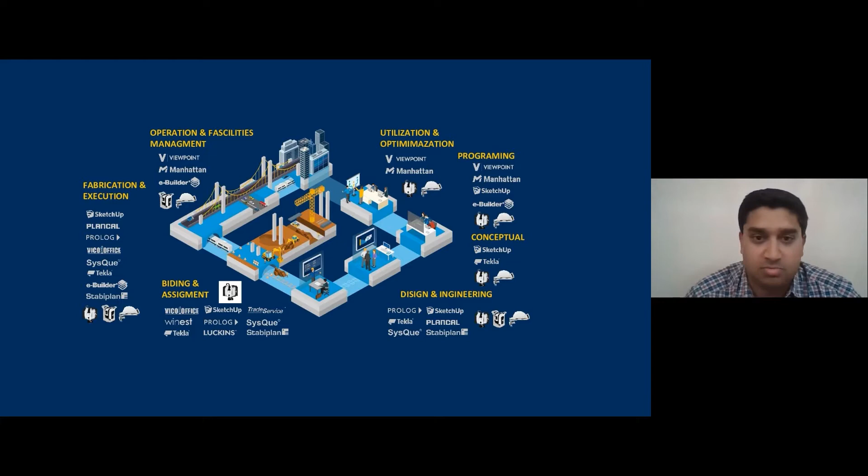Trimble itself has solutions right from a building concept all the way to building construction, to complete the full life cycle of the building. So concept to reality and onwards, all the way to facility management, and so on and so forth. So the big thing for us at BuildingPoint and at Trimble is the connected construction idea.

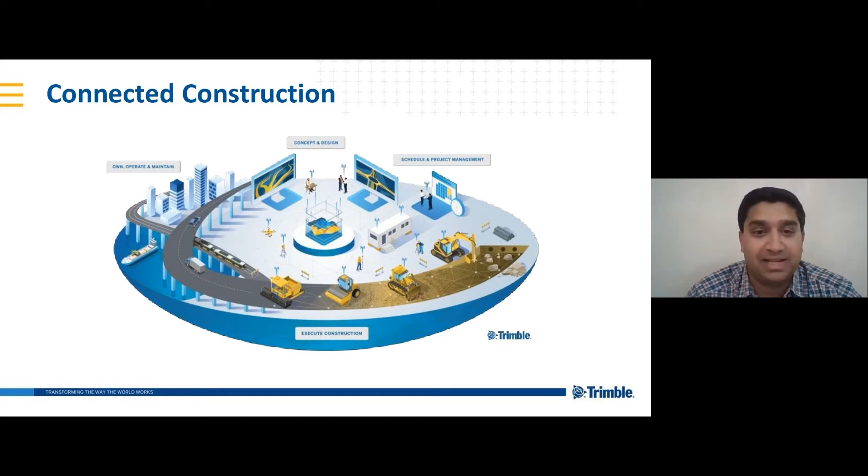We've all seen beautiful BIM models containing a lot of detailed information that can be used downstream and should be used downstream all across the construction life cycle. So the big push from us is this connected construction that brings this information forward through all the construction stages, and build from the model, build with the model.

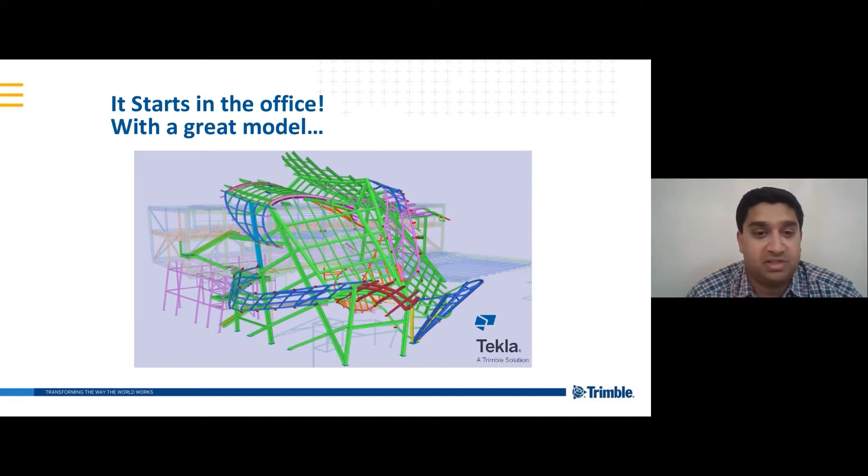So of course it all starts in the office with a great model. You put all this information into a connected model, all the parametric information, everything that is to be built should be incorporated into the model itself.

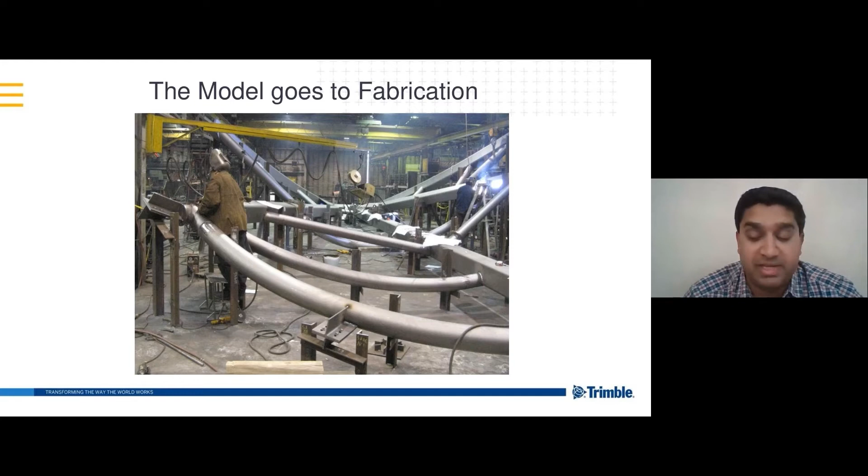And that same model then gets pushed onto the fabrication stages, so it can be used for shop use to create pieces, to create parts, for fabrication, for assemblies, and things like that.

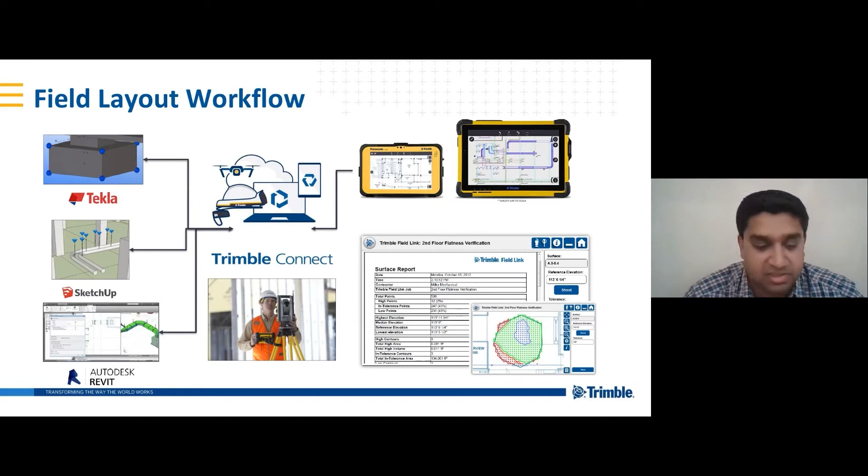Now, what happens after that is sometimes that information does or does not make it to the field in its entirety. And that's the big piece for us, where we want to make sure that this information, regardless of what tool it gets created in from your authoring tool, does translate all the way down to the field, the construction site, to make sure that all this information, the connected model, the complete information, the parameters, everything kind of gets trickled down.

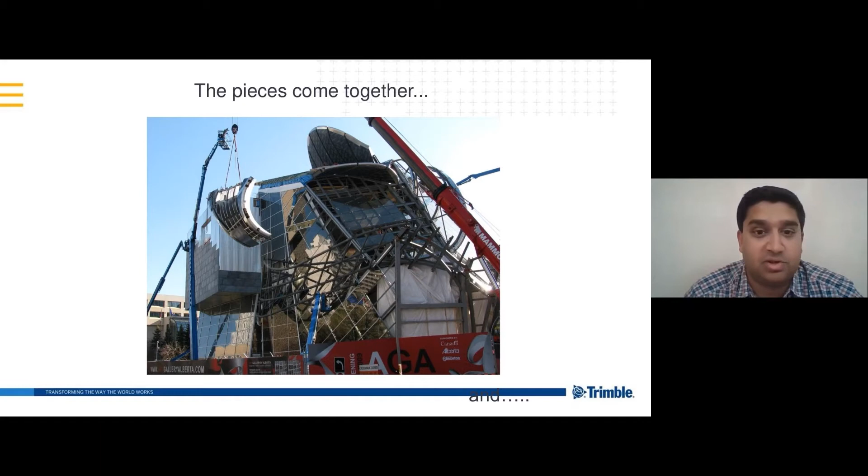So some ways in which that can be achieved is by using robotic total stations and such. So bring your point information, bring your layout information all the way to the site, and then the pieces start to kind of come together.

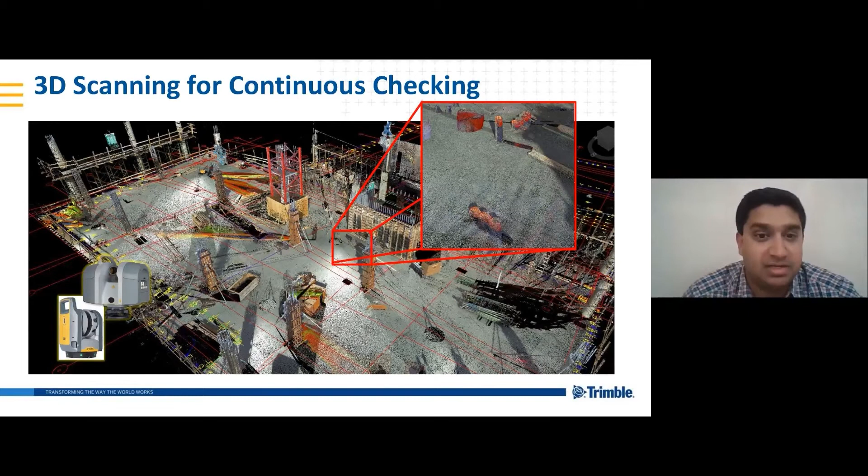From there on, we encourage the use of 3D scanning so that you can verify and check the construction progress versus your models, making sure there are no clashes, no omissions, and things are going as planned. There's not much missing out over there.

There are several tools in our portfolio. My favorite one is Trimble Connect, which allows complete collaboration all the way from the information that sits in the model and how that can be shared across disciplines, across companies, across stakeholders on the project, so that they can all share information, not just model information, but content information.

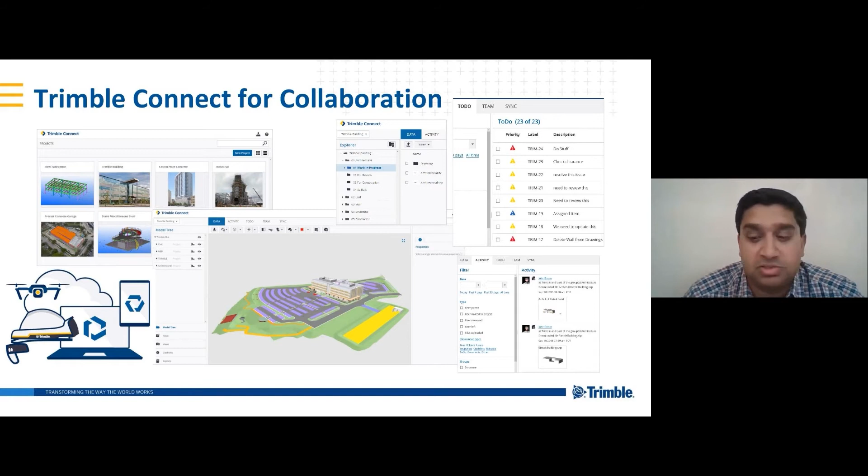And this does not have to be a one-way process. This is a two-way street. So the big push is not to work in silos, but to work with everybody and make it a team approach.

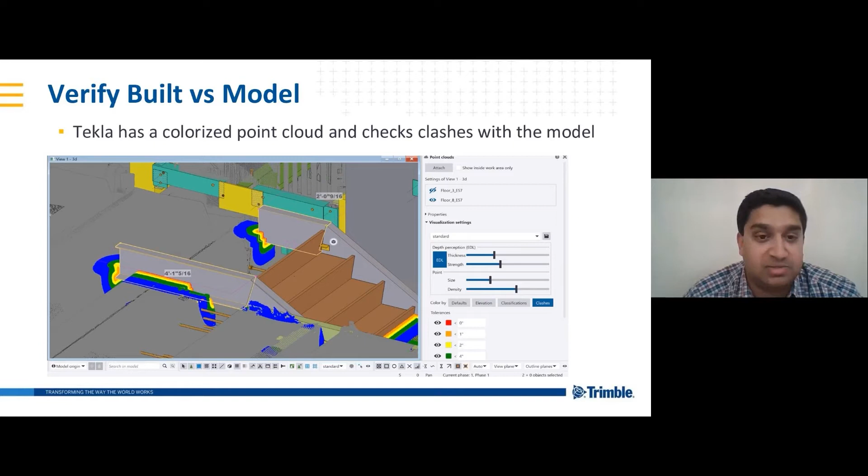So over here, the information from the site has traveled back into the 3D model. We mentioned 3D scanners - during construction stages, you can scan for information, and that information comes back into the models, and we check against the model to make sure we're not missing out on stuff, or there are no clashes per se. On this slide, you can see there are some clashes, and something like that can be found out pretty early on, and corrective actions can be taken.

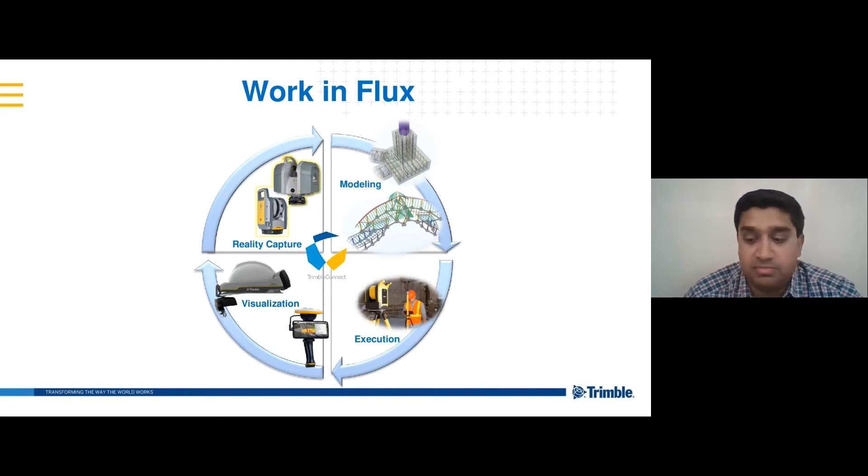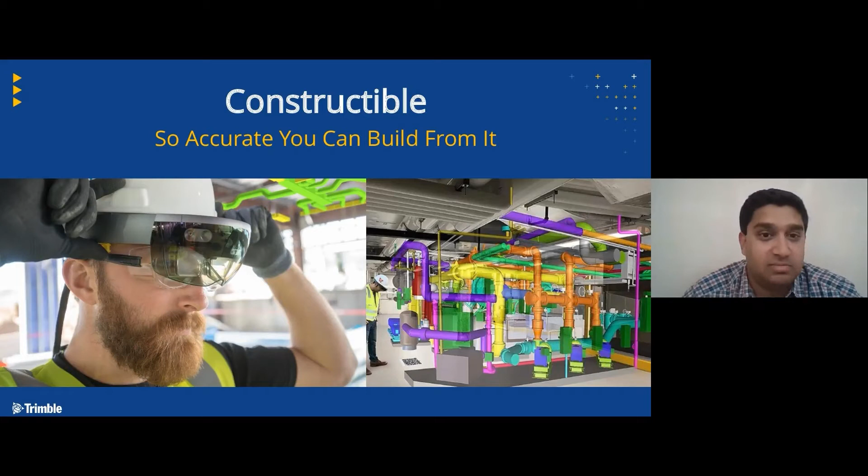And as we go through the process, voila, you have a beautiful project completed out of that same information that you started with. So the big thing from us is work in flux, don't work in a silo. Take the information straight from modeling through execution to the site, bring it back into the model, and complete the full workflow. We have various tools that can assist with that, and the big push from us again is build from the model, a constructible model. Take the information with you to the site.

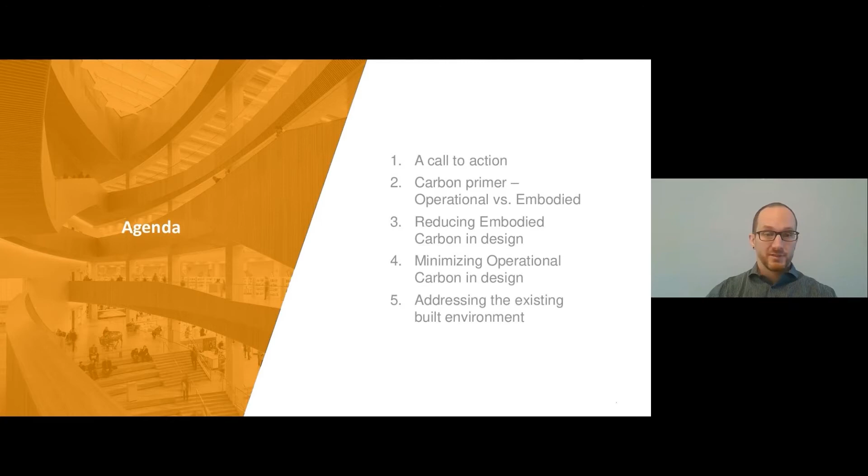So part 1, a call to action. Climate disruption is a real thing and a massive problem facing humanity as a whole. Our house really is on fire, and it's important that we begin to act with an appropriate sense of urgency.

It has been generally agreed upon that within the next 10 years, the global economy needs to massively reduce the greenhouse gas emissions associated with economic activity in order to have a hope of not locking in a series of feedback mechanisms that will amplify our own climate impacts.

To be frank, nobody has a clear idea of how this is going to play out. It is, however, widely accepted and recognized that no one industry, nation, or group can bring about change on this scale. It will need to be a collective effort across all branches of the world economy. Think silver buckshot instead of a silver bullet.

Now, in Saskatchewan, Regina particularly, from a purely weather perspective, this means that the average annual temperature is going to continue to rise through the remainder of the century. I'd like to point out that the data on this slide and the next couple of slides comes from the Climate Atlas of Canada website, climateatlas.ca. I encourage all of you to check it out and become informed of potential climate impacts in the areas where you design.

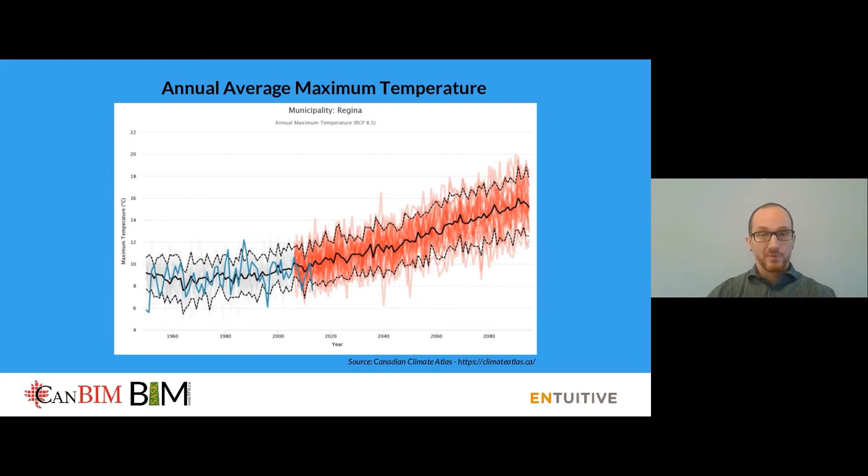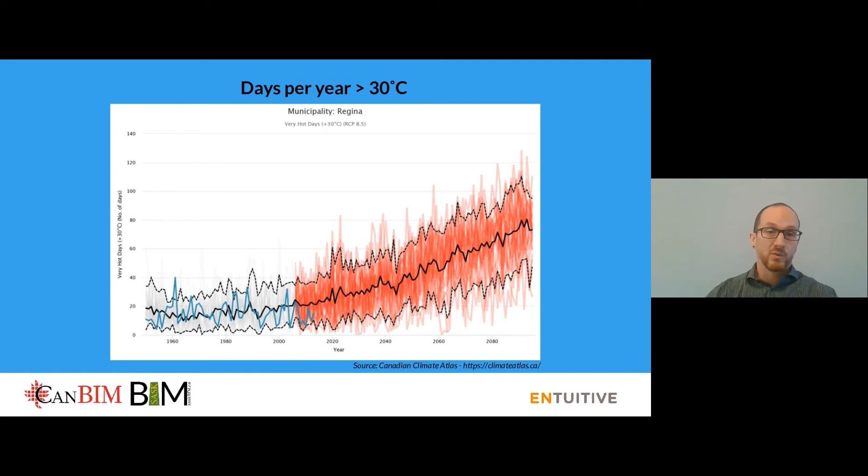A similar trend presents itself for very hot days in southern Saskatchewan, with a statistical increase expecting to see the number of very hot days triple by the end of the century, and with worst case scenarios looking at a 5-fold increase of these weather conditions.

So if you're hoping that climate change would bring an end to harsh prairie winters, you're probably out of luck. But you can expect that your summers will get hotter and have substantially more intense storms.

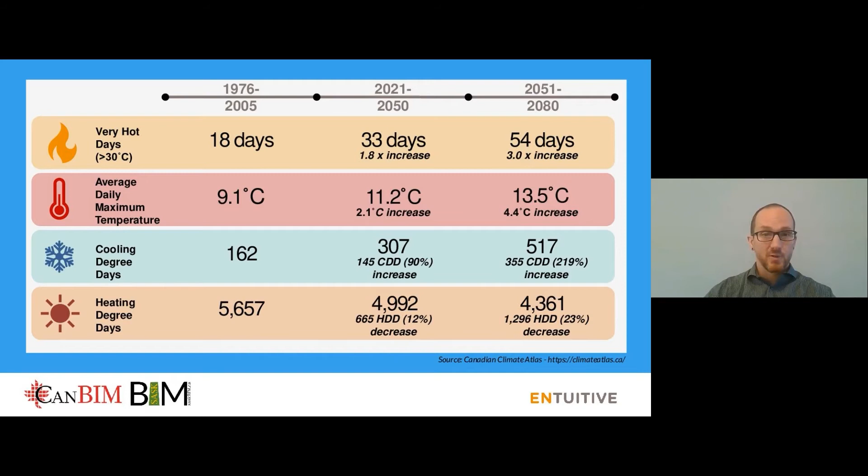I'm hoping at some point you've all seen plots like this of some kind. These next few slides are borrowed from our colleagues at Mantle 314, who Entuitive has been working closely with to gain a deeper understanding of embodied carbon and upcoming carbon policy.

These 2 plots represent the GHG emissions reduction targets necessary to avoid the worst impacts of climate change. On the left is data for the world, and on the right is for Canada specifically. Both plots share the same basic trend, requiring an aggressive approach to reductions in the coming decade after an assumed peak this year. Both plots then present continued reduction towards carbon neutrality in 2050.

It's important to note that the aggressive reductions to 2030 assume that all new construction will be carbon neutral by that point. If you practice in Toronto or Vancouver, you will have noticed energy codes that are already in place and driving towards this goal.

And in other jurisdictions, you can assume that the National Energy Code for buildings will not be far behind. It is safe to assume that no matter where you practice, the building code in your jurisdiction will have reached a level of stringency to demand the design of all new buildings be net zero for carbon by 2030.

These targets also assume that the entire built environment, whether new or existing, will be carbon neutral by 2050. This was the impetus for cities like New York, who recently implemented Local Law 97, requiring operational carbon reductions from existing buildings that are enforced with steep financial penalties for those who don't comply. Similar programs have been announced and are soon to launch in Washington, D.C. and St. Louis, Missouri, and you can anticipate that they will begin making an appearance in Canadian municipalities soon.

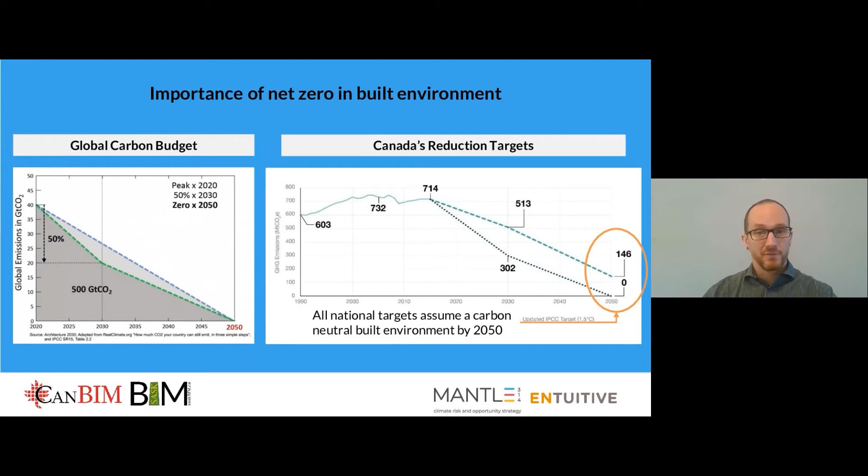Now, there's a big reason why so much focus is put on the sustainability of the built environment, and that's that we're a big part of the problem. Roughly 40% of total global greenhouse gas emissions are associated with the construction, operation, and demolition of buildings.

All this is to say that none of this sustainable design stuff is particularly optional anymore. Net zero buildings are no longer niche or only for the leading edge projects. They are no less than a necessary ingredient for the human species to continue to thrive.

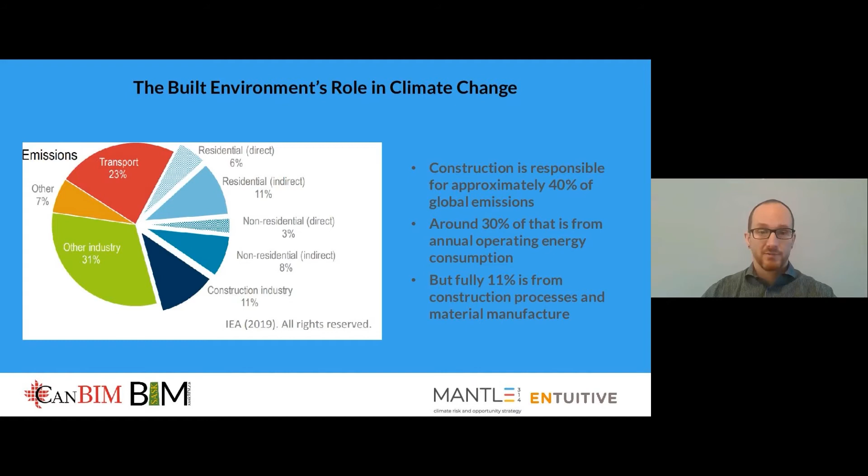So we have a long way to go in a short period of time, which is a really awkward problem for the design community, as architecture, not unlike yoga and the law, is a practice. And it might seem like semantics, but in this case, the words used really matter. Design of buildings is a body of knowledge that is based on repetition and informed by past precedent.

But we don't really have precedents to work from when it comes to a carbon neutral, normal building. Changes to required design approaches have come on so rapidly that folks like me, who really aren't that far into our careers, have more or less seen all of the rules completely rewritten.

So how are we going to get there? Hopefully, given the M in CAN-BIM, it shouldn't be too much of a stretch to realize that I'm going to advocate heavily for a model-based approach to inform our designs where we can't rely on precedent anymore.

But in pushing for a modeling-based approach, I always like to bring up personal hero, statistician George Box, who is frequently credited with the most important thing to remember when using simulation to inform a design process. That is specifically that all models are wrong, but some are useful.

I'll throw in a few reminders, but please try to keep this in mind as we work through some of the case studies, that the goal of analysis isn't always to identify the absolute correct answer, but to give guidance that facilitates decision-making.

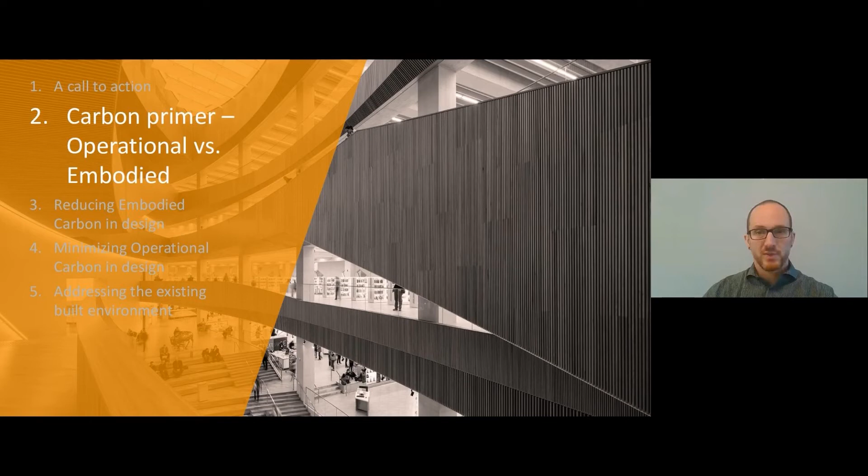So now that we've framed just how massive the problem is, and why the design and construction industry needs to be a part of the solution, I'd like to give a little bit more explanation of embodied and operational carbon emissions so that we can see how they relate and the nuanced difference between the two. Hopefully this will put us all on an equal footing going forward as we look at the details of the case study.

So we saw some similar data presented a few slides back, but it's worth highlighting again that the construction, demolition, and operation of buildings accounts for just under 40% of global greenhouse gas emissions. Digging a little deeper into that number, it is currently about a 3-to-1 split between operational and embodied carbon.

Operational carbon being the GHG emissions associated with the energy consumed to operate a building. This is the carbon emissions that we're all familiar with. It's associated with operating the local electrical grid, as well as any fossil fuels, typically natural gas, consumed for space or water heating within the building's property line.

Depending on how that local electrical grid is fueled, very similar designs can have vastly different operational carbon impacts, which is why the industry is pivoting to start focusing more on carbon than on energy efficiency, as had previously been the case. Embodied carbon is a much more nebulous concept, and it's the emissions associated with the extraction, processing, manufacture, transportation, installation, and demolition of all materials or components that make up the building.

It's essentially the emissions associated with all the stuff that makes a building what it is. Whole life carbon or life cycle carbon is a term that captures those total emissions as one lump sum. It's good to remember that this total number is really what we're aiming to reduce, and the physics of our planet's atmosphere really doesn't care how these emissions are classified.

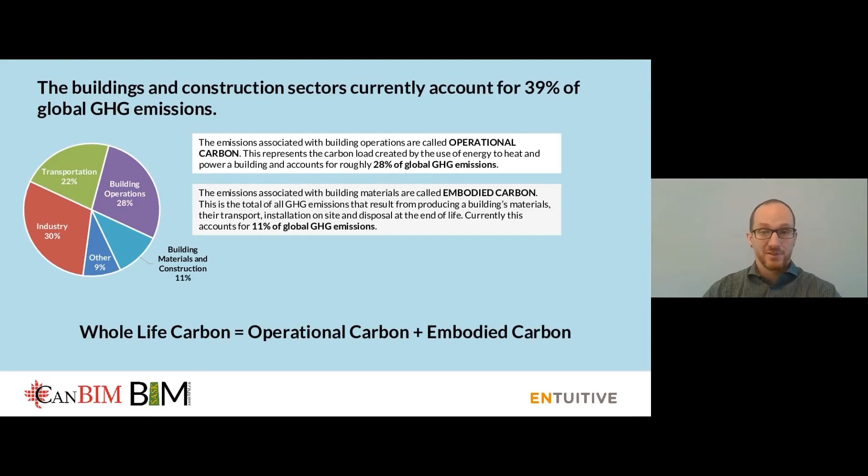This diagram is also courtesy of our partners at Mantle 314, and it helps illustrate this breakdown further. The operational carbon piece really only exists inside the purple box in the middle of the slide, while embodied carbon emissions can occur throughout a building's life cycle, even through ongoing maintenance during the operational phase.

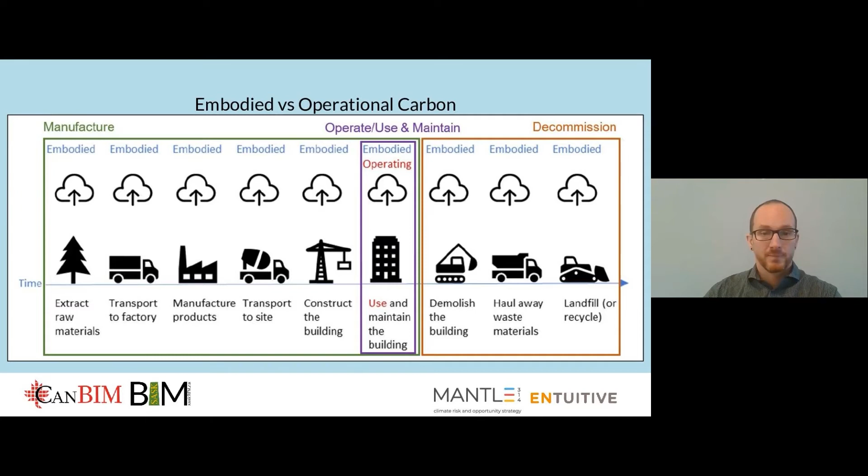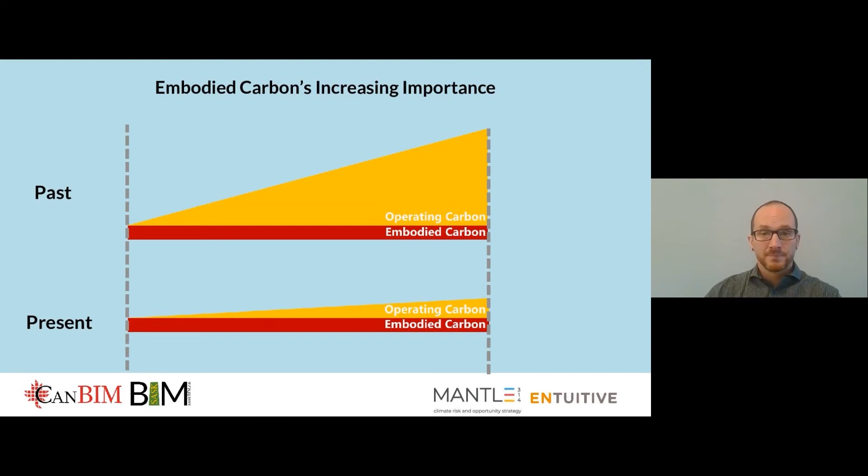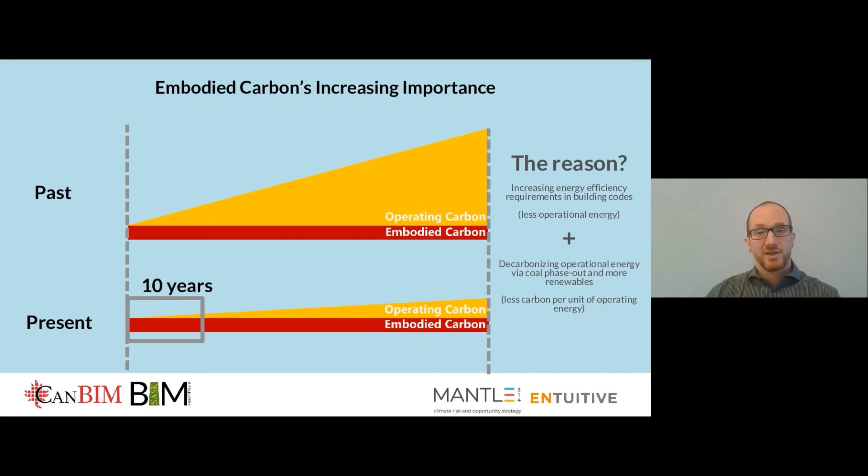And finally, given what we know about the need to reduce emissions rapidly in the next decade, we can see that embodied carbon makes up the lion's share of the carbon debt accrued by a modern building in its first 10 years. This next slide is another way of looking at that same issue.

As operational energy consumption decreases and electrical grids decarbonize, embodied carbon becomes the primary source of emissions in the building sector.

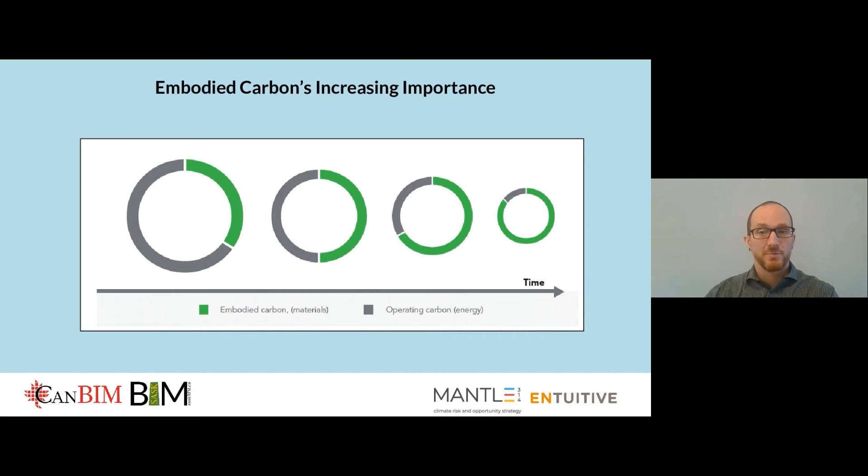So hopefully, I've successfully made the case for why looking at embodied carbon as part of your design process is important. But what can we do about that?

So I'd like to introduce you to CarbEN. CarbEN is our in-house tool that has been developed for evaluation of embodied carbon in the early phases of the design process. We like working the letters EN into everything we do at Entuitive.

You just kind of get used to it. But I apologize for the pun. I'd also like to apologize in advance to any structural engineers listening in on the presentation, as this is not my area of expertise. So I'm going to do my best to stay in my lane on the technical aspects of structural design while still giving you an idea for what the tool can do.

So in a nutshell, the tool accepts architectural concept inputs from Rhino, and then uses built-in smarts to build a concept level structure to compute material quantities. Total embodied carbon estimates are then based on One Click LCA and EC3 databases.

This helps to bypass the fact that a detailed structural BIM model is rarely prepared until much later in the design process. I want to point out here, though, that this tool shouldn't be confused with tools for detailed structural analysis like SAFE, RAM, SAP 2000, or ETABS.

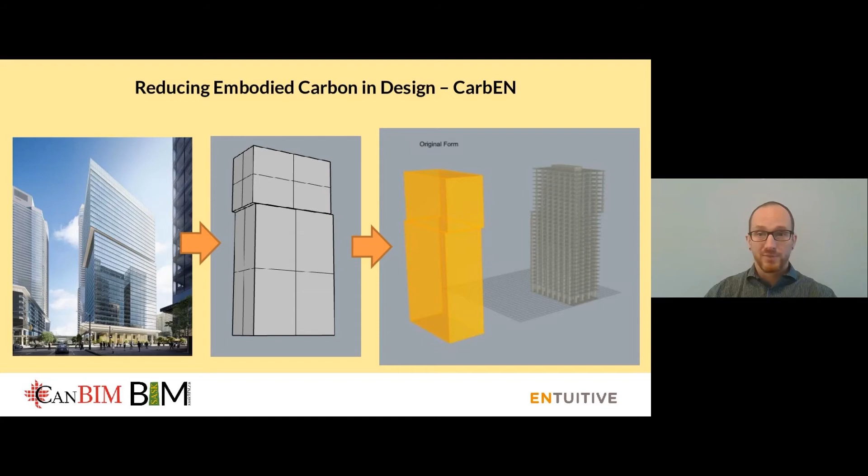And so from a structural design point of view, you might say that this model is wrong, but from an embodied carbon angle, it is incredibly useful. The examples I'm illustrating in the screenshots here are for a concrete structural design. We have a similar module for steel schemes, and a mass timber module is in progress.

The tool accepts up to 10 use cases for a building where different floors or groups of floors would have different loading conditions. This is great for the modern mixed-use retail office condo building typology.

And after determining a concept level structure, CarbEN then allows adjustments to key structural elements, such as column layout, shape, number of steps, and what floors those steps occur.

Once inputs are confirmed, Karamba is run in the background to apply total loading to a membrane mesh, applying the loads to the columns and the core. And from here, the tool back calculates what the total column dimensions and material quantities are to calculate the total embodied carbon.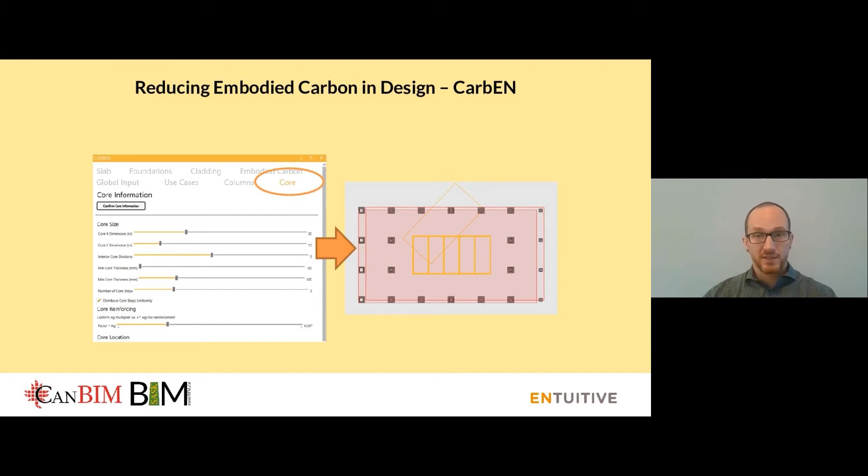There is a core tab where you can custom size and place your core to influence the structural calculations, but the core tab itself doesn't do any structural calculations. So it's important that dimensions and locations for your building core are realistic for the type of design being examined. The core tab still feeds back to the columns calculation, as there are no columns placed within the area defined for the core.

There are similar tabs for both slabs and foundations that take almost the same tack as the columns tab, where they take user inputs in terms of structural design preferences, and then calculate in the background what the required slab or footing dimensions and material quantities will be before calculating total embodied carbon.

The tool also includes a cladding tab, which allows you to select cladding system. There's a couple reasons for this. Cladding choices can have a high embodied carbon content themselves, and also apply to the loading calculations and the total weight of the building, so can influence the embodied carbon of the structure as well. The tool allows assigning multiple cladding systems applied as a percentage share of the total facade area.

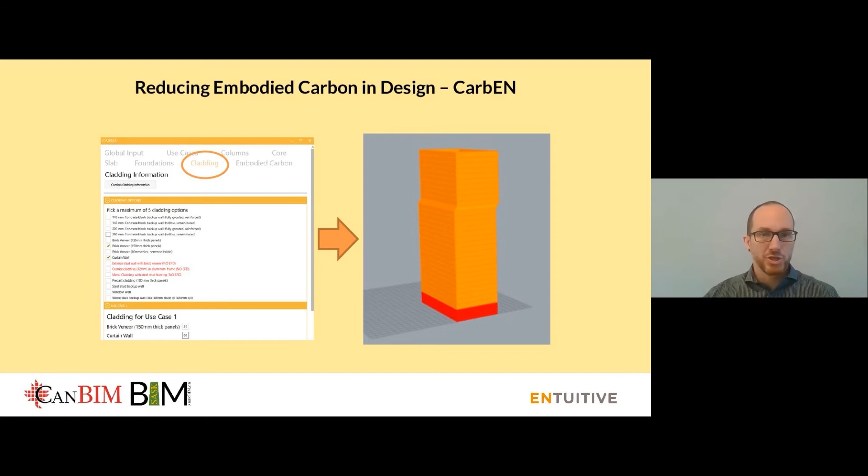And at the end of it all, the tool provides outputs for embodied carbon by material type or element type, as well as by use case or by floor. I'm particularly fond of the element type results because these can be very illustrative at helping design teams to know where their efforts can have the greatest impact. You know, is the most embodied carbon in the slab, or is it in the foundations?

And while not instant or real time, the tool is relatively fast compared to building a complete detailed structural BIM model, and it is fast enough to allow answers that can allow for optioneering of different structural approaches based on a desire to limit embodied carbon at the earliest stages of design.

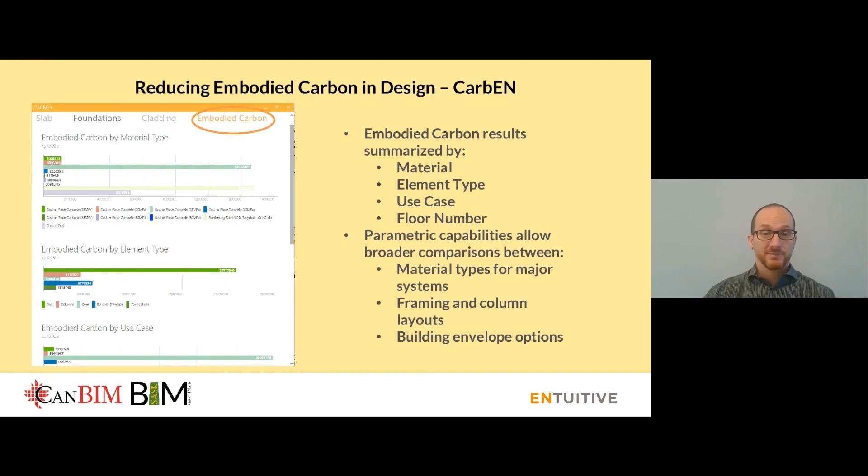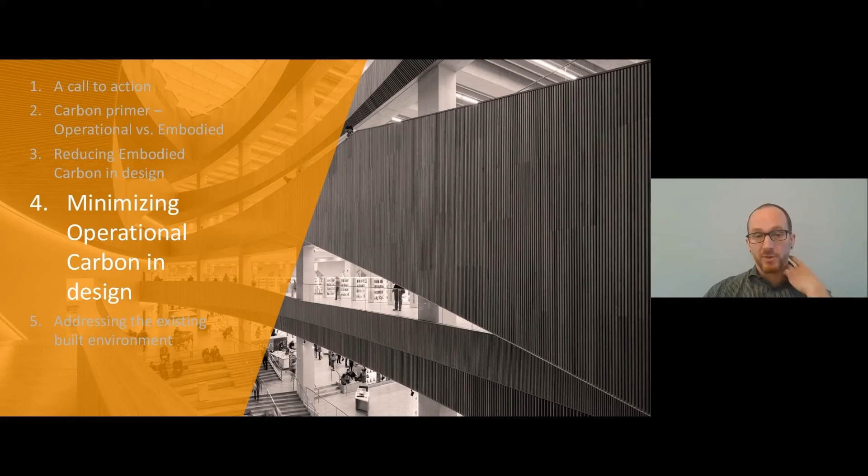So now we have a tool in our toolbox that helps us look at embodied carbon, and I'd like to flip it now and have a look at how we can influence operational carbon through the design process as well.

So you'll notice a similar trend when it comes to looking at operational carbon, in that to properly address it, it requires early involvement by an analysis team before aspects of the building design become locked in.

Traditionally, the analysis of a design's energy consumption was held until late in the design process, when it felt that there was enough information that an accurate energy model could be prepared. But given that we all know that all models are wrong, striving for an accurate prediction of final energy use has always been a bit of a fool's errand, certainly in the design stages.

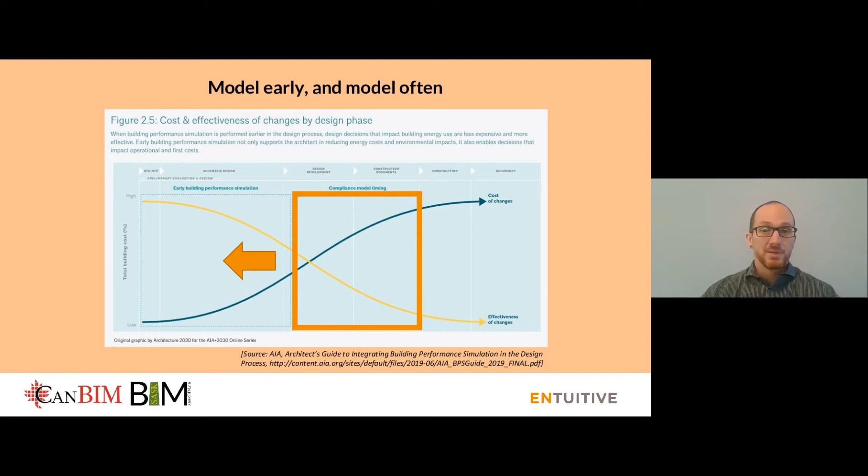There has been a lot of ink spilled in recent years about the so-called performance gap, which completely misses the point of what performance simulation is best suited to do. And by pushing any modeling out until later in the design process, the results that come from that modeling process have limited ability to influence the actual design, which leaves a lot of opportunity on the cutting room floor.

In the worst case scenarios, this was a business as usual building, getting some solar panels put on the roof for a green power purchase agreement that was made to offset the impacts of an otherwise poor design.

Much more common and indicative of sort of the first generations of LEED was the attempt to engineer our way out of a design with the application of high-end mechanical systems and controls to limit the energy consumption required to meet the heating and cooling demands that were locked into a design based on its form and opacity.

Where we really need to start in our design process is to start thinking passively first. Design parameters like window to wall ratio, floor to floor heights, massing, and orientation of a building are often decided early without specific consideration to performance, only looking at programmatic needs and desired aesthetics. The design question needs to become: how can we design spaces that need active conditioning for mechanical systems for as few hours as possible each year? Ditto for lighting systems. How can we maximize the energy provided by the sun while it's available?

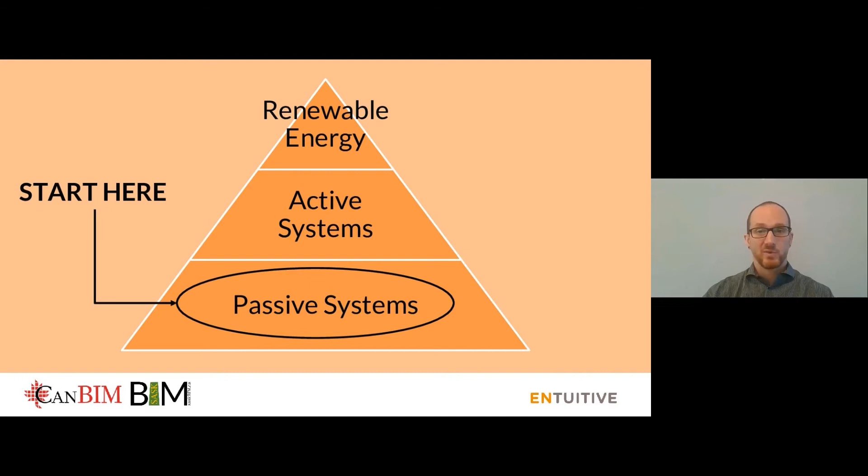Analyses to support this can look at issues such as daylight and glare avoidance, modeling how design decisions around window placement and area can influence both good and bad solar exposure. As focus shifts to a building envelope that is far more substantial, there can become a point where perimeter mechanical systems can be greatly reduced or even eliminated.

A simulated approach looking specifically at thermal comfort can help assuage concerns about the effectiveness of how a space will feel without mechanical conditioning. This can help keep projects under control by limiting the amount of redundancy or belt-and-suspenders approach that needs to be made in a design.

The same can be said of natural ventilation. Analysis of local climate patterns and prevailing winds can help inform strategies for how openings need to be placed in order to drive the required amount of fresh air into a space. I anticipate that the attractiveness of natural ventilation approaches is about to have a bit of a resurgence in a post-COVID world.

And sometimes eliminating strategies can be just as useful as knowing which ones to pursue. A climate or site analysis might point to favorable natural ventilation conditions during shoulder seasons in Regina, but it would be an entirely different story in Atlanta.

An approach that we like to take in the earliest stages of design is shoebox or simple box modeling. This approach reduces the need to have a set form for a building, but instead looks at key design parameters like space type, gross floor area, number of stories, and intended form efficiency to build a model that is representative of the concept to be pursued without actually being accurate to its final form.

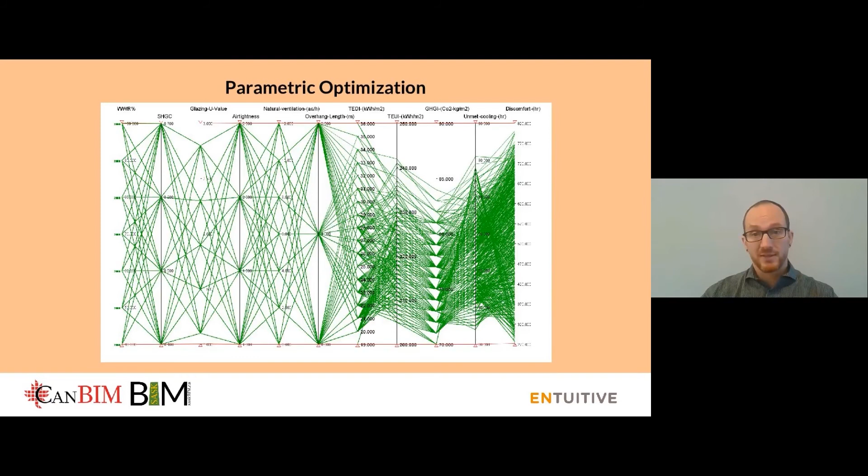My personal favorite is a free web-based tool called Design Explorer that was initially developed by Thornton Tomasetti out of the States. So hats off to them for putting a great tool up that's free to use for everyone.

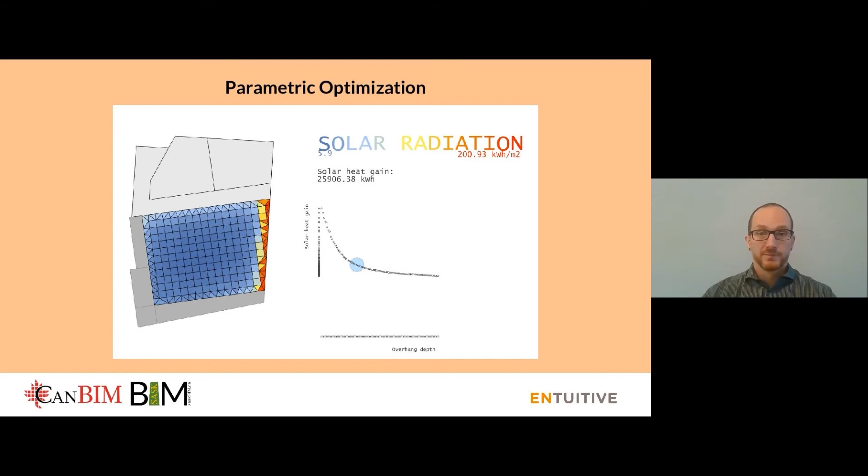For both examples, it's important to note that they both only focus on a portion of a building, with the answers that are obtained then applied more broadly throughout the entire design. So in some ways, this method is akin to digital prototyping, but specifically around building performance.

And so finally, moving towards that ultimate goal of a carbon neutral built environment by 2050, we tear down and replace very few tall buildings. So there's a real need to reconcile how to get a wealth of existing building stock that was designed long before any standards for building energy efficiency were in place to a level of carbon neutrality, to avoid those worst case scenarios of the climate crisis.

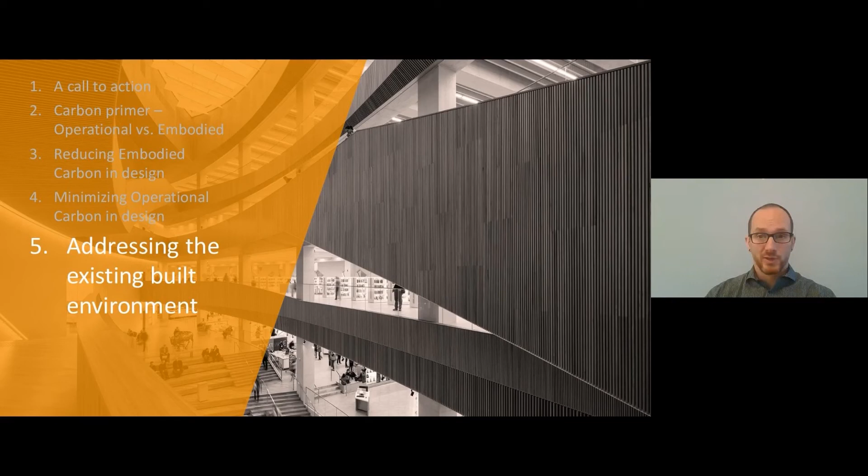This is especially important as an existing building typically incurs far less of an embodied carbon debt in its retrofit than when constructing new, particularly if the structural systems are maintained.

So these next few slides are going to give a glimpse into some research that was undertaken by Entuitive and the University of Waterloo, looking at generative approaches to overcladding of post-war residential towers. I'd love to take a deeper dive into their methods and results, but unfortunately their research hasn't been presented at the conference it was developed for, and I don't want to give any spoilers.

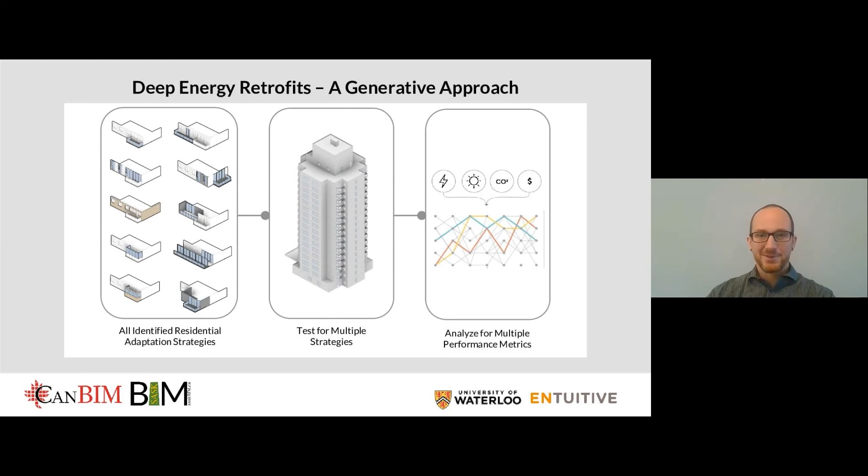So I'm just going to give you an overview of the approach that they took. Their existing building was first rationalized, and then configurations of different modules that could be built outboard of the existing structure were tested. These configurations were analyzed for daylight availability, life cycle carbon, and heat energy for all possible configurations of modules.

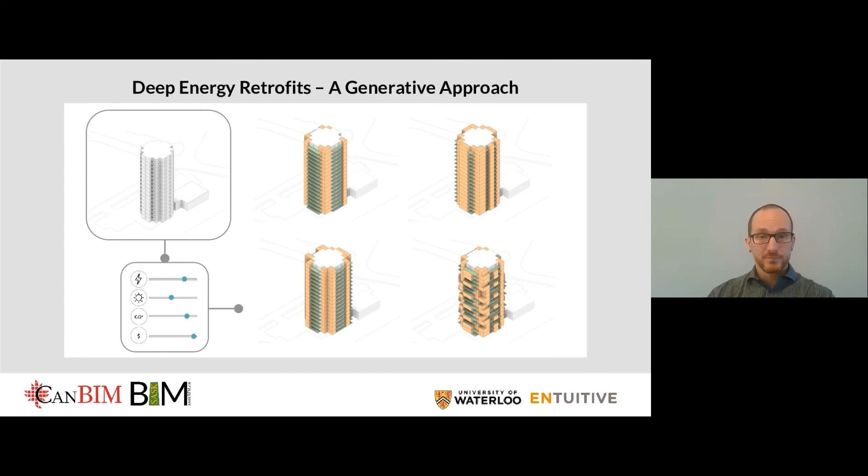An optimization approach was then taken to identify the cases that had the lowest life cycle carbon as well as the lowest structural complexity, to identify an appropriate set of solutions. And then the inclusion of simulation for daylight and heating energy allows those elements to be used to select the preferred option from this subset of optimized candidates.

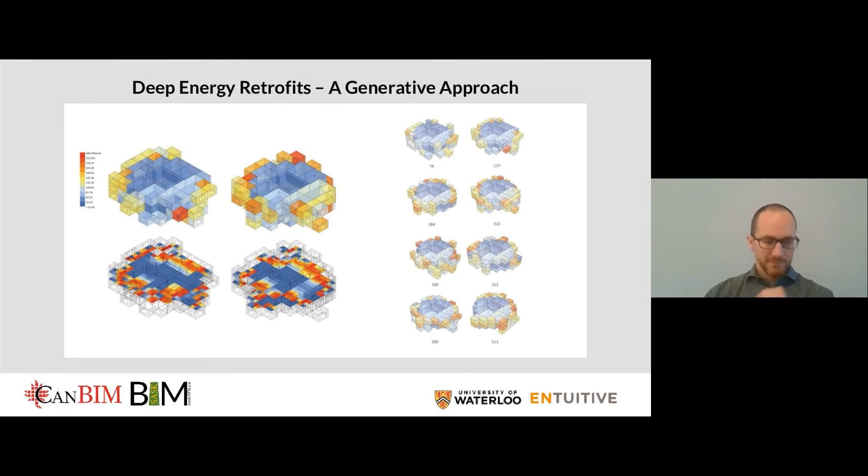And moving on to digital twins. From what I've seen from recent CanBIM presentations, the digital twin is not an unfamiliar concept for this audience. And while I have seen a lot of exciting approaches to digital twins for managing risk, construction complexity, as well as digital prototyping, they also have a significant application for reducing energy consumption and the associated carbon emissions in the existing built environment.

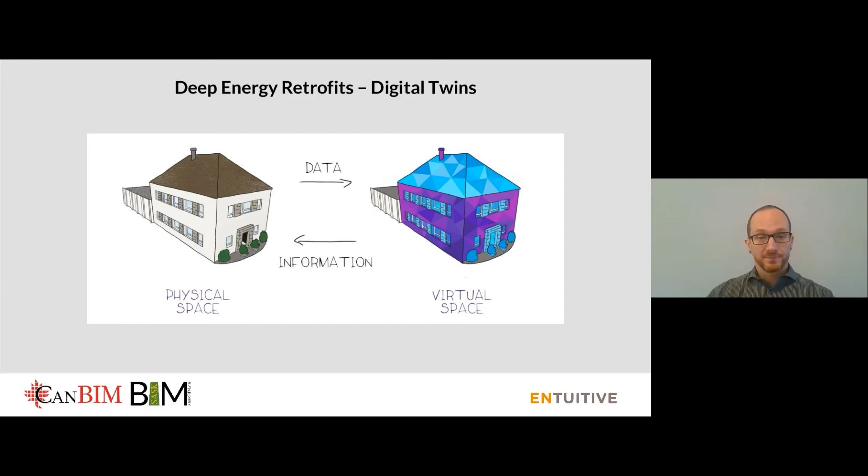So in a nutshell, a digital energy twin leverages an existing building energy model to provide the physics and heat transfer calculations to fill in the gaps that can exist in sensor data. And as the cost of Internet of Things sensors has continued to fall, we're able to extract far more data from an existing building to complement the high-level bulk information that was presented by utility meters and building management systems.

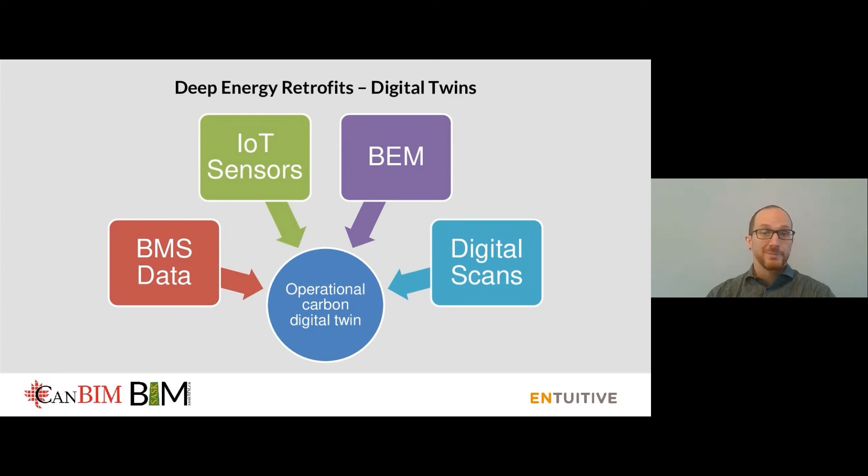This first step of tuning the existing model often identifies areas of low-hanging fruit where energy was already being wasted, and can make a clear case for shallow retrofit. But the real power of a digital twin environment is that it introduces an accountability approach through ongoing measurement and verification of savings that can be used to help secure retrofit financing.

This ability to secure financing for this type of deep operational carbon intervention has really been a stumbling block for many existing building projects in the past, as the upfront costs to achieve the kind of carbon reductions that we need to see tend to far outstrip what exists in a typical maintenance budget, while still having a reasonable financial payback when looked at from a financing point of view through a bank or a bond.

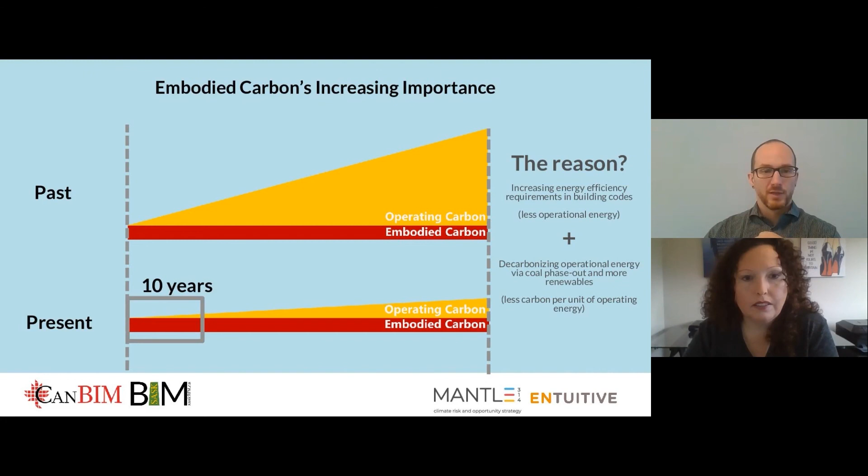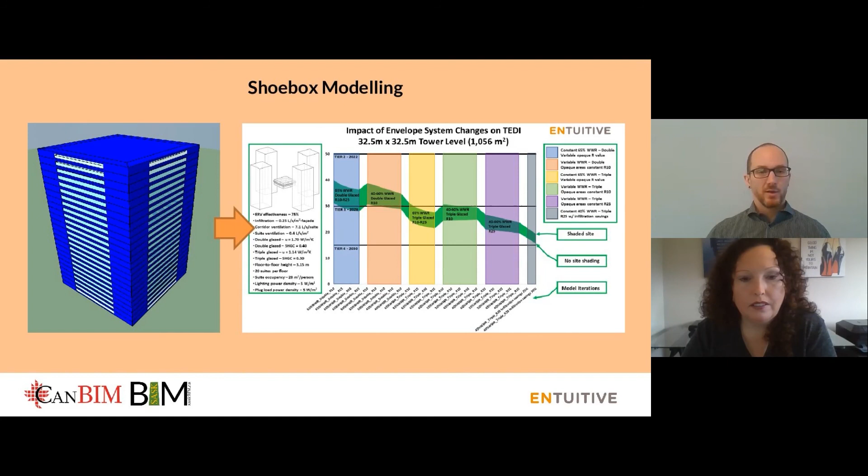Some of that early shoebox modeling I was talking about looks at very big moves around the building — what's the impact of floor-to-floor height on anticipated heating energy demand, or does the building need to thermally break any balconies it's putting outboard? The ability to answer those questions early sets those design bumpers, and as we move down the design process we can narrow them to make sure we're staying on target to hit our goals of carbon neutrality.

Now, how do methods for assessing some of the potential passive design strategies you described, such as daylighting and natural ventilation, differ from the early to late stages of design?

That plays again into the narrowing of the design envelope. For something like daylighting, you might initially just look at a bulk parameter like window-to-wall ratio or visible transmittance of your glass, just to see roughly what percentage of an open floor plate will have access to usable daylight throughout the year.

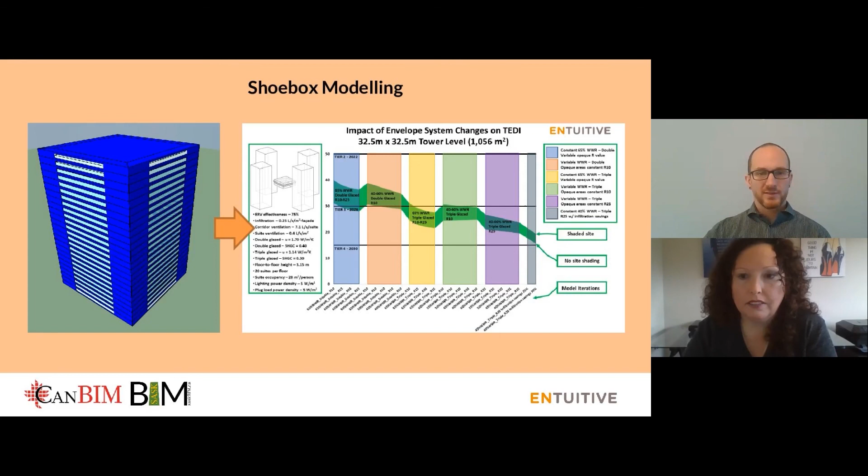So it really takes starting broad, looking at what big moves you can address early, and then trying to figure out a way to winnow that down into a more specific and detailed analysis case to assist the design team.